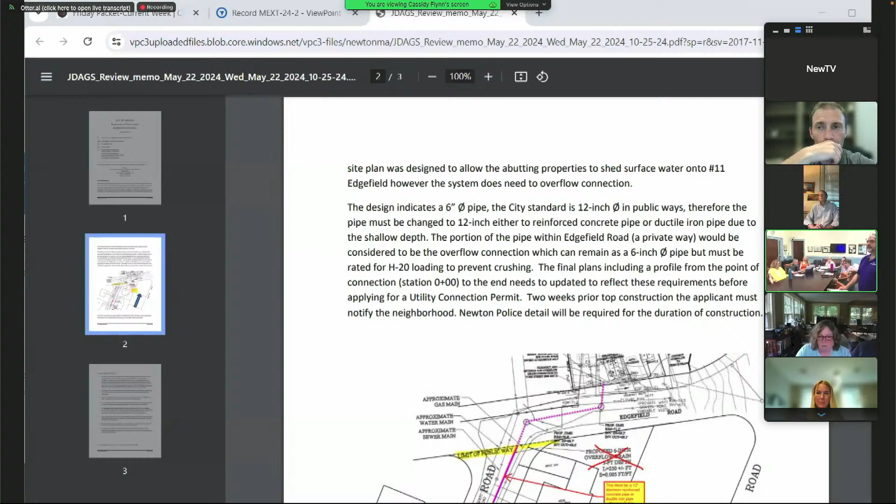So the site that's under development is this property number 11. This area of Larkspur Road is going uphill, so the option to tie into a drain manhole over there would require them to pump, which doesn't make sense because pumps can fail or go out during the worst time when there's a heavy rainstorm event. So the topography is such that the closer drain is physically uphill. I disagree with that. We'll let you comment. You'll have your turn.

Mr. Daghlian, can you tell us exactly where the other drain is on that map? So the other drain is near the intersection. This shows a catch basin over here, and that's the drain manhole. So that's uphill of their system, so they would actually have to pump. The city always prefers gravity. I understand the rationale for it completely, use gravity to work for you, I get that. I think we're going to hear from the residents that they don't believe it's uphill. I'm just trying to understand.

Well, it did drop the minimum cover, and everything is uphill above the site. So they're going to be tying into a drain manhole they're going to construct here, extend 152 feet to the end of the public right of way, and then put in their pipe to the overflow connection. The beauty of this design is that the neighborhood in this area, where I witnessed 3 or 4 sump pumps discharging to the front yard, can tie into the system eventually. Right now they're pumping water to the front yard, it gets into the ground and back again, it's just recycling. With this overflow connection, it'll go out to the Charles River.

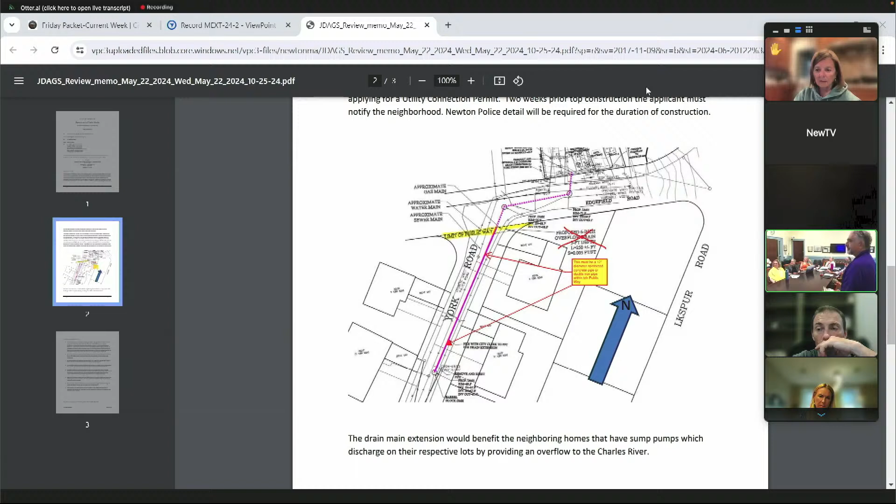I want to recognize, when you're done, Councilor Albright, because she hasn't spoken yet, okay? We all set? Councilor Albright. Thank you. I think Councilor Laredo had an excellent idea to move hold on this and give the other folks on the street the opportunity to see if they want to join in. So I'd like to move hold. Okay, thank you for that. I think it's a great idea because we can have further conversations. Your ward councilor is here, and we can understand the situation better.

I have one more question. At the beginning of the meeting, he stated that the other options were cost prohibitive, and now he's saying that's not the situation. To capture your own water is cost prohibitive. I mean, to have a system so expansive that it could take all the runoff from everywhere else. That's what I meant. But the house next door did it. The house next door is just their own system, and they're higher. You said it was cost prohibitive for them to capture all the water on their own property. We're going to hold this item, so there'll be more time for discussion, okay? I want to recognize Councilor Danberg, who's had her hand up.

Thank you. I just wanted to understand whether the gravity feed system would have to be connected to York Road and Larkspur Road. Is that an uphill connection? Uphill of the existing proposed site. Yes. So they would have to pump uphill. You'd have to pump up Larkspur. So it makes much more sense to have it run down York Road. And the gravity system gives neighbors the ability to tie in.

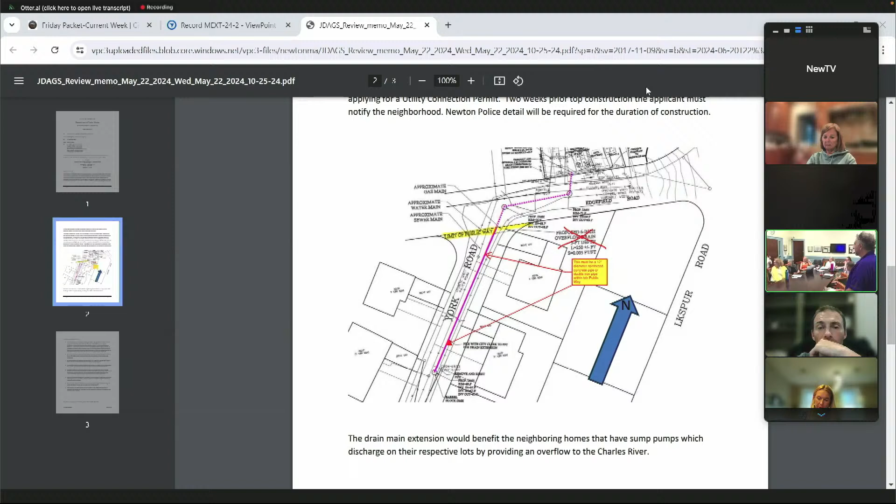I would just suggest you go drive by this house and see what it is. Because we're telling you all this stuff, you're seeing pictures. Go drive by and see what the scoop is. Okay.

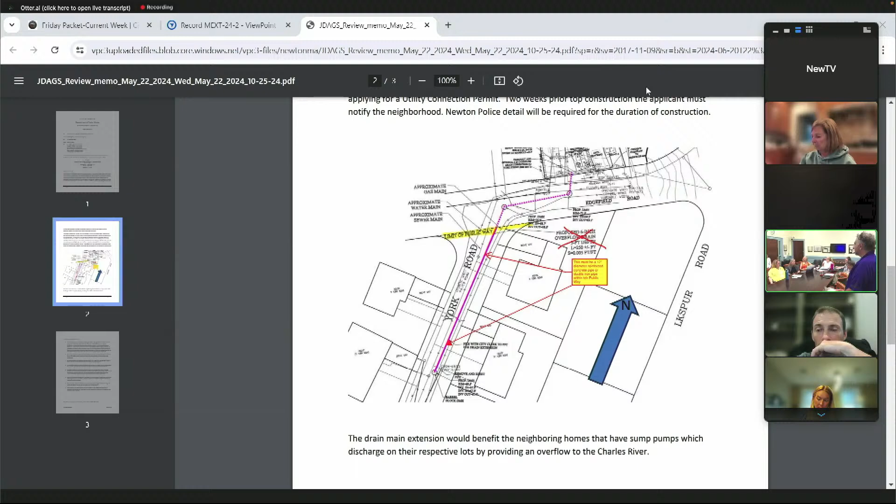You guys know what you're doing this weekend, okay? Okay. Go check it out.

Okay, so Councilor Albright has made a motion to hold this item. All those in favor, please say aye. Aye. Right, and we're holding it with conditions, so we'll be coming back to talk about the neighbors that are going to be given an option to tie in, and keep the public hearing open. Sure. Yes. I was just going to ask if the abutters could give me their email addresses, that way I can send you the agenda when it's going to be on the agenda. That'd be great. I'll go over there.

Okay. So before we vote, I'm going to make a motion to close the public hearing. Should we keep it open? Keep it open? Oh, we should, okay, yeah. That's right, we did just hold it, because we're going to come back to it. Okay. Thank you. Thank you for being here.

We can actually discuss the next two items together, but we're going to vote on 269-24 first. So let me read this into the record. This is the 558 for the Franklin School at 125 Derby Street. This is to demolish and replace the existing Franklin School with a new school of approximately 71,000 square feet. And the other item is 241-24, to appropriate $73,608,506 and authorize a general obligation borrowing of an equal amount for the construction of the Franklin School project.

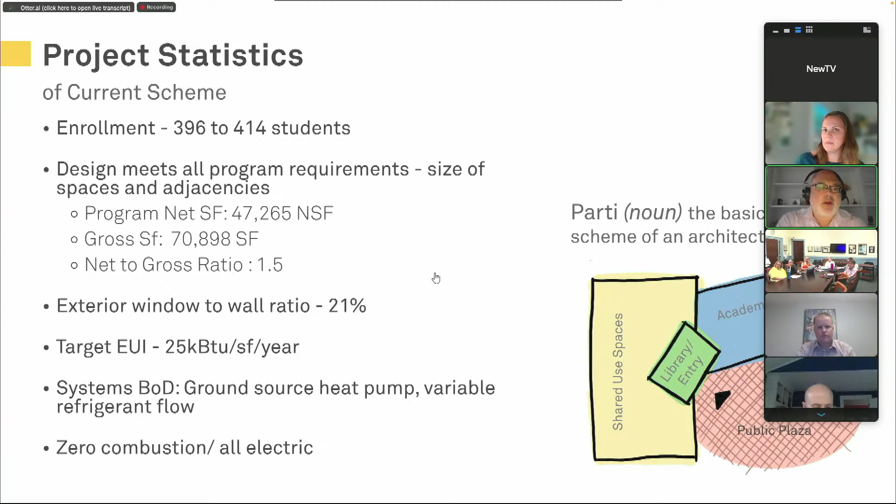The building is fully accessible on site with no stairs, no ramps, just sloping pathways from end to end. Every pathway you see is graded to be accessible.

Along Derby Street, there's a bus loop for 2 buses, which they think will be the maximum at a time - often it'll just be 1. You also have a blue zone with a sheltered handicap spot at the front, so that cars in the blue zone don't pull forward into that handicap spot.

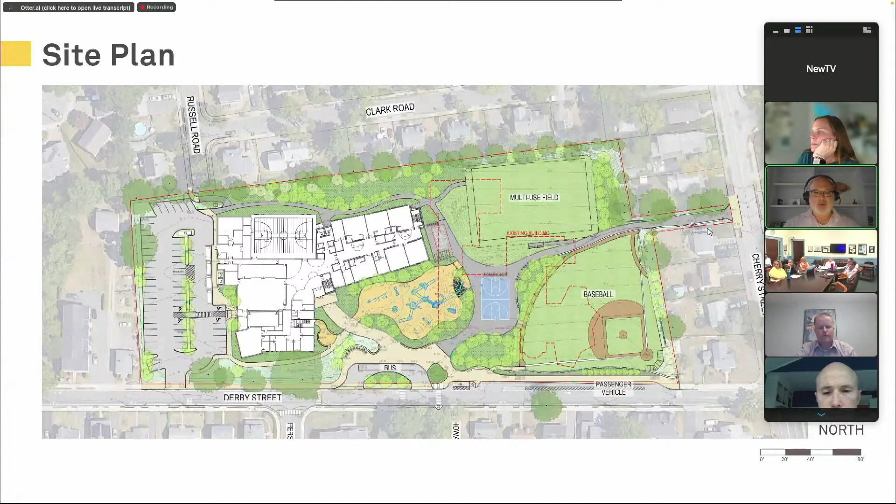One of the big changes is that Cherry Street access, currently automotive, will be changed to pedestrian and bike access. As Mark mentioned, this cuts down on an existing safety issue and creates an additional community path onto the site, especially to those community uses of the fields and the playground.

Some of the statistics related to traffic management: there are 90 staff proposed for the Franklin School, 65 full-time and 25 part-time. Again, 2 buses, as we talked about.

The blue zone capacity is 12 to 15, including that sheltered handicap spot. Within the new parking lot, there will also be drop-off and pickup positions for 4 vans. Currently the school has 1 van, but because of the additional district-wide bridge special education program, they're planning for as many as 4. So with 60 parking spots, the remainder - 30 - will need to be managed on off-site parking.

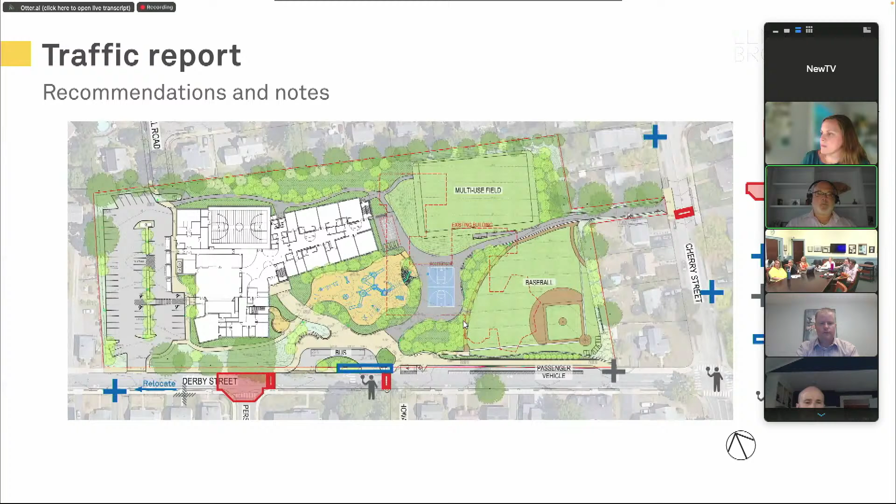We've submitted the stormwater management plan to John Daghlian and received a very clean set of comments.

Our strategy uses porous pavement throughout the parking lot and some paths. There are fairly large infiltration systems north of the building and extending east, as well as under the basketball court and bus loop. There's a fairly small bio retention basin between the baseball field and playground dealing with site water more than building water, as well as catch basins on the way down to the Cherry Street access point. There are 4 catch basins along that route because of the slope of the path, which we're regrading to create ADA access.

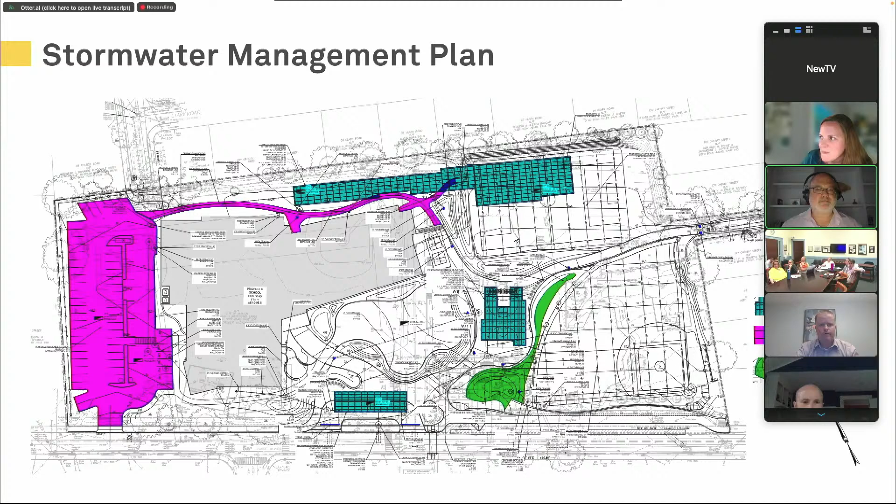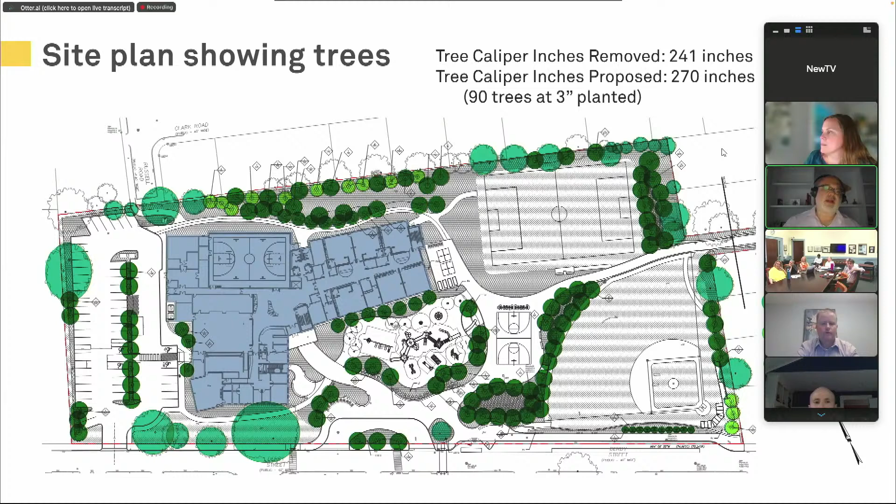Just briefly, a little bit about the building planning. The wing to the east with the classrooms is a 3-story classroom wing with kindergarten and first grade on the first floor, second grade and third grade on the second floor, and fourth and fifth grade on the third floor. You can see the extra kindergarten-first grade classroom that is right now planned to be a first grade classroom, but should a bubble come through, it has the opportunity and is fitted out to be used as a kindergarten classroom.

On the wing of the building to the west side are all the community and public spaces. That includes the lobby that you enter straight from the main path from the bus loop, the gymnasium, the cafeteria and kitchen with its platform connected to the music room, which is a model that you have in a number of your schools, as well as admin and medical suite spaces.

Again, you see the classroom wing rising up on the east side. The second floor of the communal wing, or community wing, has a library, which overlooks the lobby and connects to the classroom.

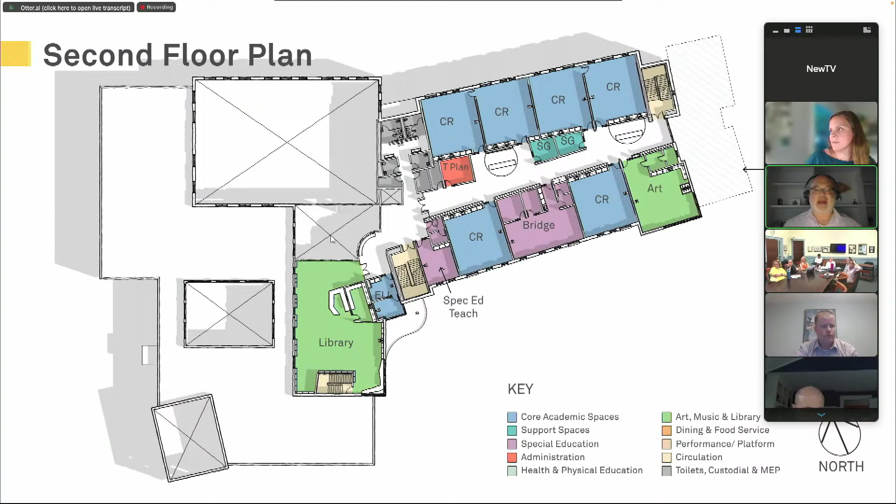The third floor is very much like the second without the library, with the fourth and fifth grade, as well as reading, math, and EL rooms.

We have been working with the working group and the DRC through a number of material palette decisions and investigations. These include masonry and brick masonry for the most part, and a number of different colors of brick masonry, as well as different ways of creating extra interest within the brick facades, meaning bricks that pop in and out and create patterns across the facades.

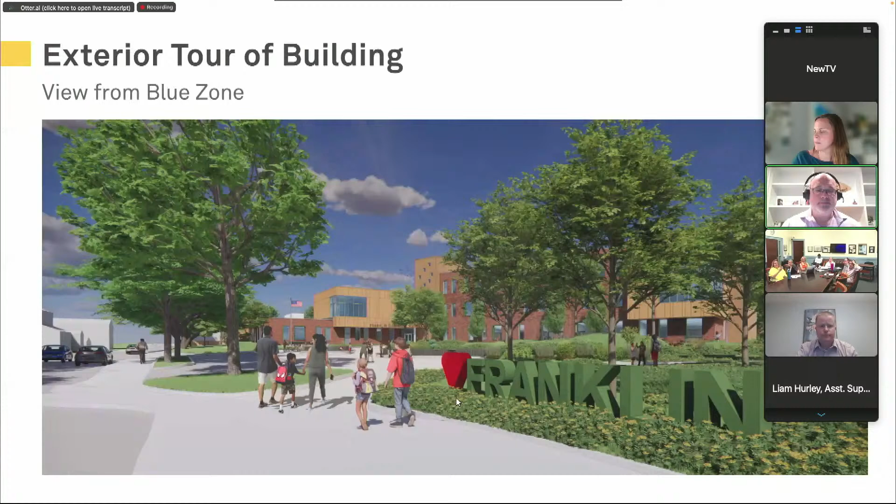Getting closer to that front door, again you see the motif of these special elements: the library, the math and reading room, as well as art on the second floor. Then the music room, which you can make out through the trees all the way to the left. These special elements are what are clad in this wood phenolic material, and they also pop out from the volume of the rest of the building and announce themselves, using that same language to also announce the front door and the sign connecting the stair tower to the library.

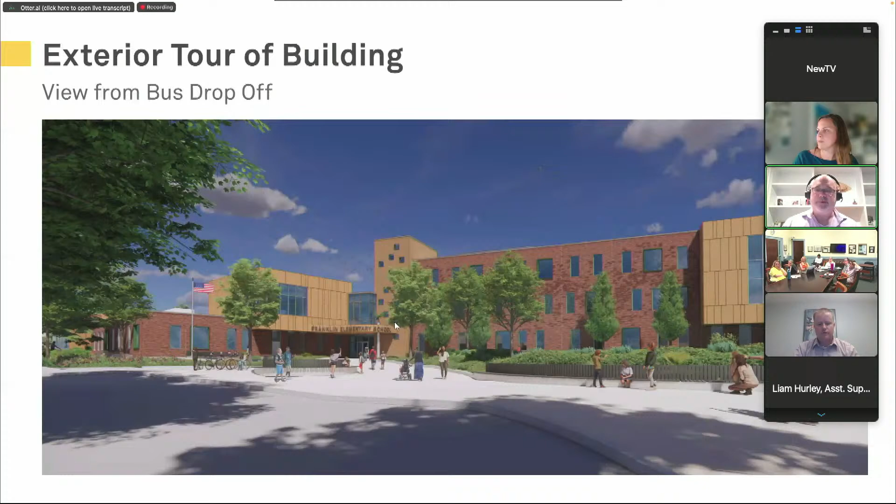Coming up closer to the front door, again you see that same element I just described. We're also looking at a sculptural falcon. We keep calling it Freddie the Falcon because Franklin's symbol is the falcon, and the color is green, by the way.

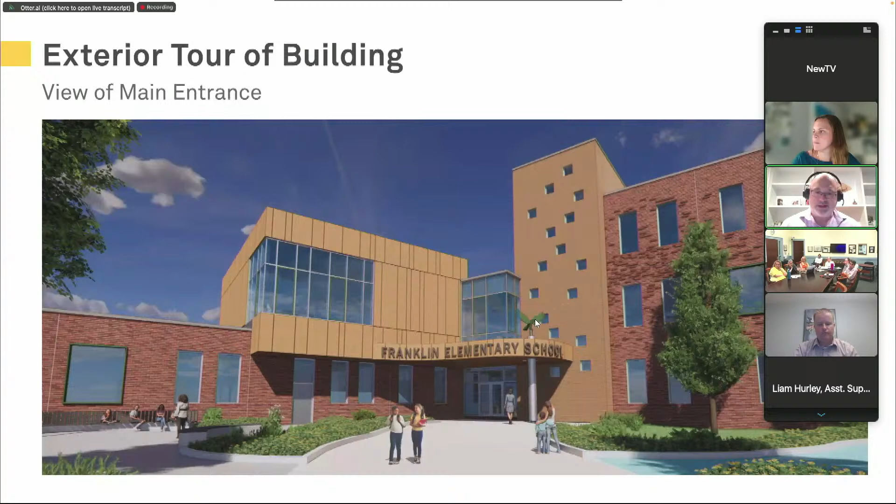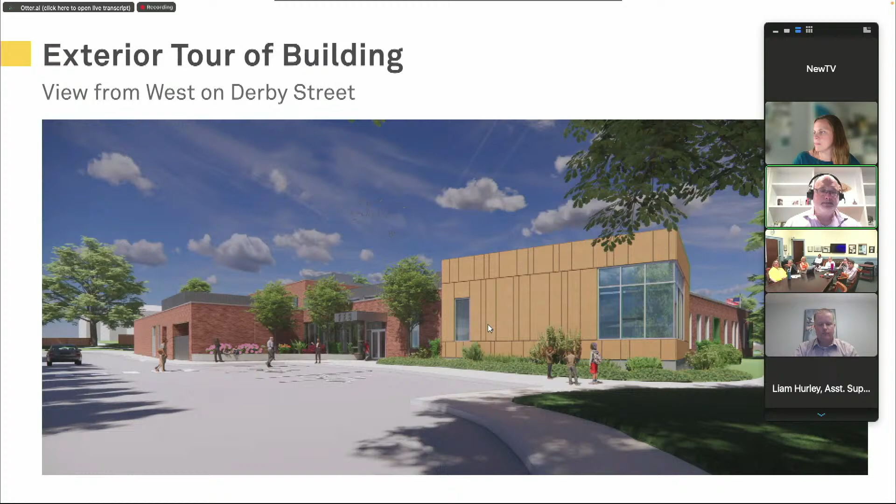Coming a little bit further around, still focused on that entrance to the cafeteria and the glazing to the cafeteria to let natural light into that space. You also see the tertiary entry, a service emergency entry that leads into the service area and to the gym corridor.

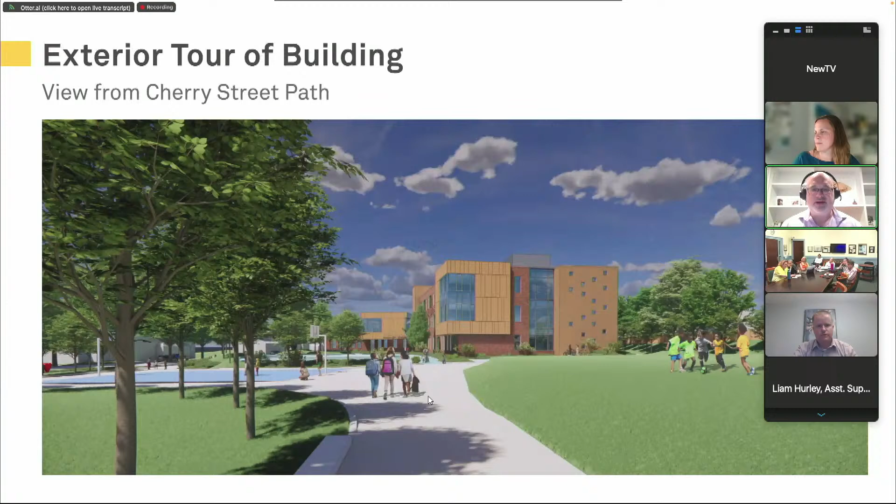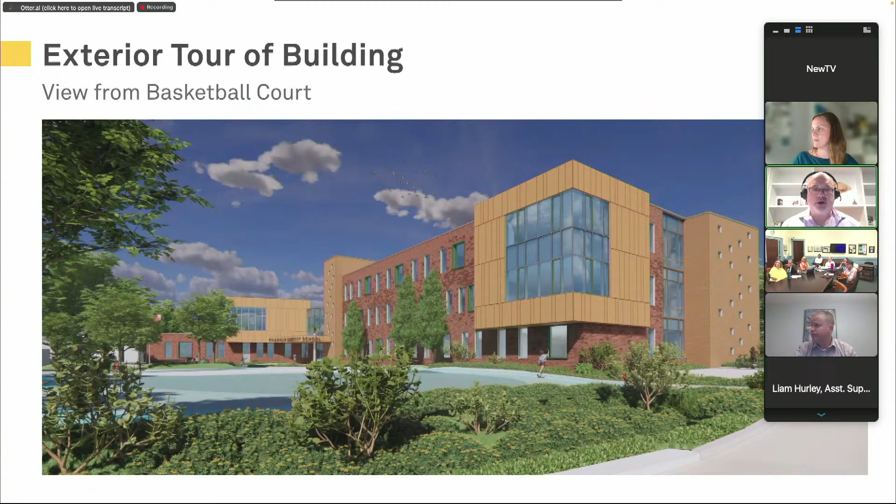Getting closer, now you're just before the basketball court. That's what's right in front of you here. Nope, that's not true—that was the playground, wasn't it? Sorry, you're actually closer, standing in the basketball court, and what you were looking at was the playground, excuse me.

Heading around towards the back, this motif of the blonde brick pairs well with the phenolic volumes, demarcating the stair. This is the back stair.

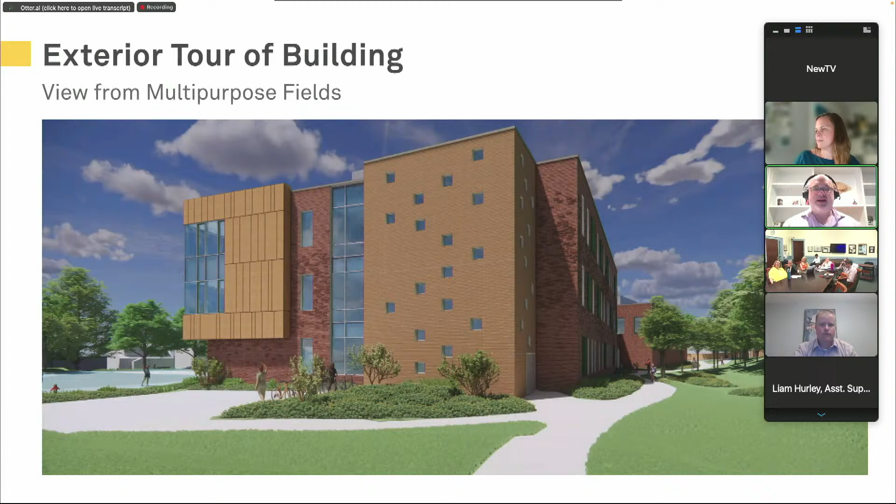And then heading towards the gymnasium, to the left is the 3-story academic wing, and the gym to the right, with its secondary entrance and exit directly to the gym.

I believe that's our last slide. Is that correct? Yep, it is. So with that, I welcome any comments or questions, anything we can help with. Thank you very much for that very comprehensive presentation. I'll take it into the committee and see if there are any questions. No questions, I think this is great. I'm ready to vote approval whenever Councilor Kelly wants to make a motion.

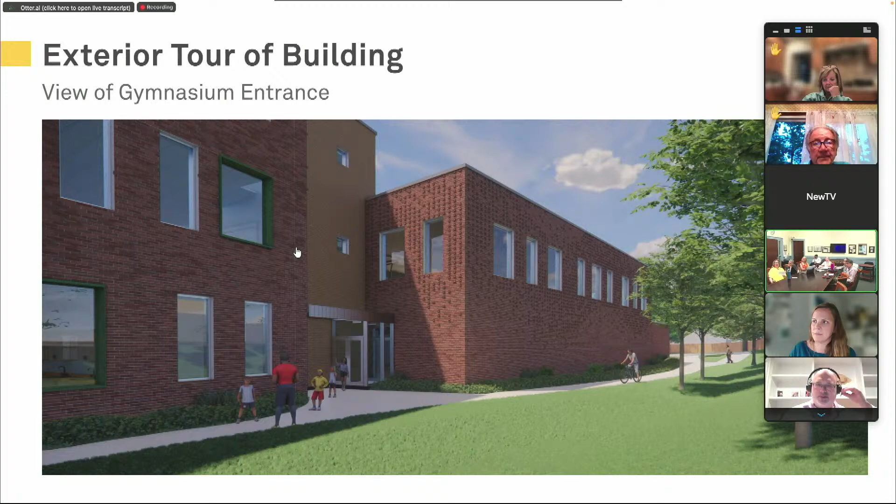Can you talk more about how they're going to handle 30 off-site parking spaces for staff? Where and how do you plan to manage that? Or maybe I heard you wrong. No, you did not hear me wrong, but I think I might be the wrong person to answer the question. Can I pass that on to Alex or Josh? Sure, I actually didn't hear that correctly—did you say 3 parking spaces? 30. Oh okay, good, I was going to say we need more than 3. I wish that's all we needed. 3 would be great. Yeah, absolutely.

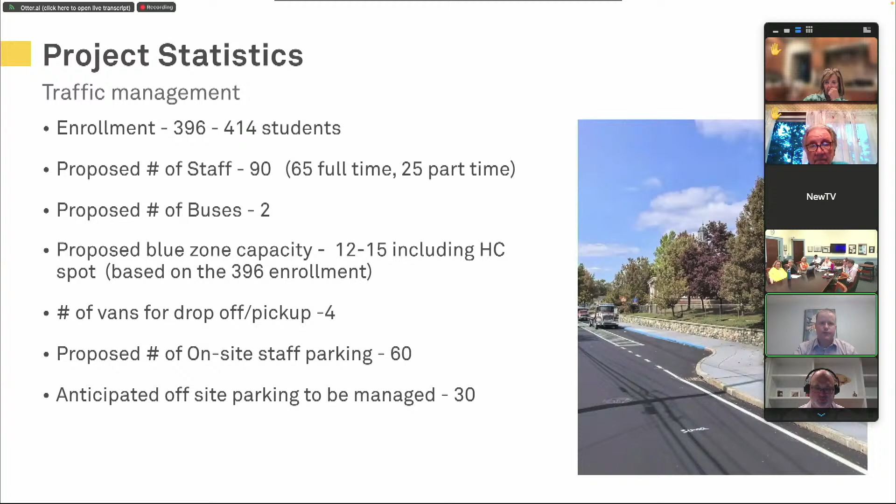So in general, on our projects at Angier, Zervas, Cabot, Countryside, Franklin, Lincoln, Eliot, we typically target roughly 55 on-site parking spaces, some a little less, some a little more. This is primarily due to site constraints, but also the delicate balance of asphalt to open space, green space, play space, and those other elements. Here for the Franklin School, what we would end up doing is a parking management plan. The 30 parking spaces offsite also include a lot of part-time staff with varying schedules, so it wouldn't necessarily mean we need 30 spaces filled all day every day. That's something we'd work on with Newton Public Schools, Mark and his team, DPW, the Traffic Council, to develop a parking management plan, similar to what we've done for folks who've served on our building committees in the past. That's something we continue to work on in the next phase of design and communicate out to the community to get feedback.

And then ultimately, oftentimes the parking management plan is a pilot, and then we see if there's any changes that we need to make after the fact. Are you primarily thinking that the 25 part-time staffers will be parking on neighboring side streets?

So I would say that in general, again, I am one voice in this, but in general, I think the logical locations are Derby and south of Derby, as opposed to north of Derby. Clark Road, Russell Road are very, very narrow. And even some of the streets to the south we'll have to keep an eye on too. They can get narrow. But again, I would imagine that what we're probably looking at is somewhere closer to 15 to 20 parking spaces, with some of those being shared because of those part-timers.